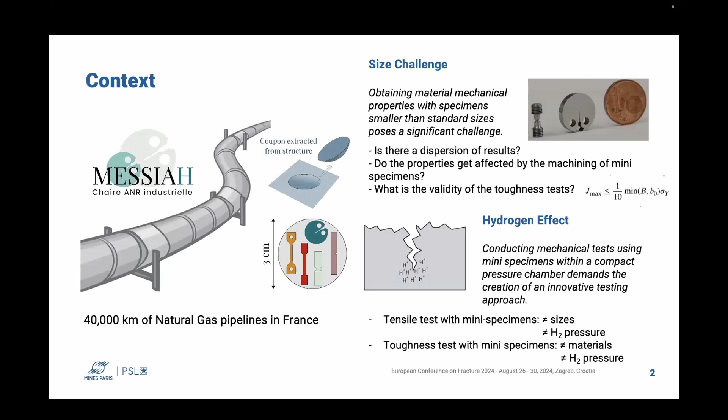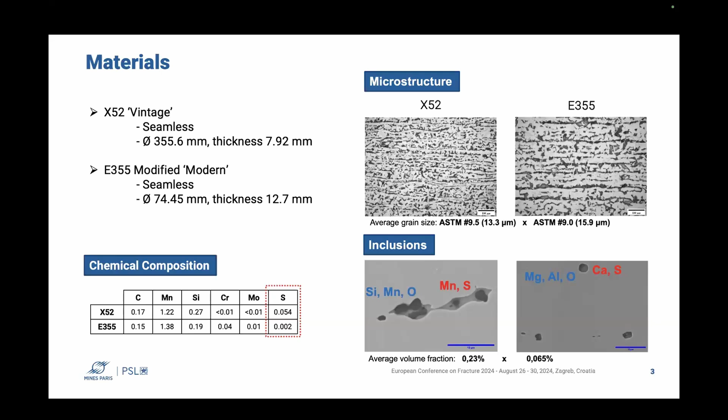Now for the geometries of the specimens. I will present results with a standard tensile specimen that has 4 millimeters diameter and 20 millimeters gauge length. Actually, I brought some specimens to show you.

There are 4 specimens here that are mini tensile specimens - you can pass them around. This is a standard toughness specimen, to compare with the mini toughness specimen. And here is the standard tensile specimen for comparison.

I present two geometries of mini tensile specimens, with 2.4 millimeters and 4 millimeters gauge length, and mini specimens with 1.2 millimeters diameter and 2 millimeters gauge length. Also the mini toughness specimens that have a width of 10 and thickness of 5 millimeters.

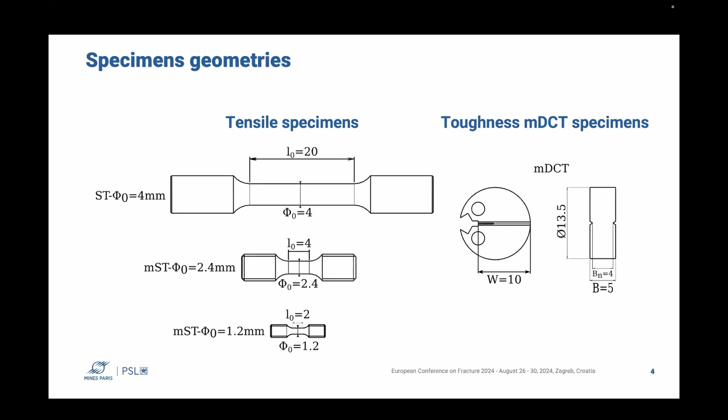First, to validate the mini size specimens, we performed tests in the MTS machine with an extensometer, controlling the environment in air condition. We followed the local strain, meaning the necking, with the edge tracing technique, where we put a camera and a light to follow the contour of the specimen, giving us information on the radial strain.

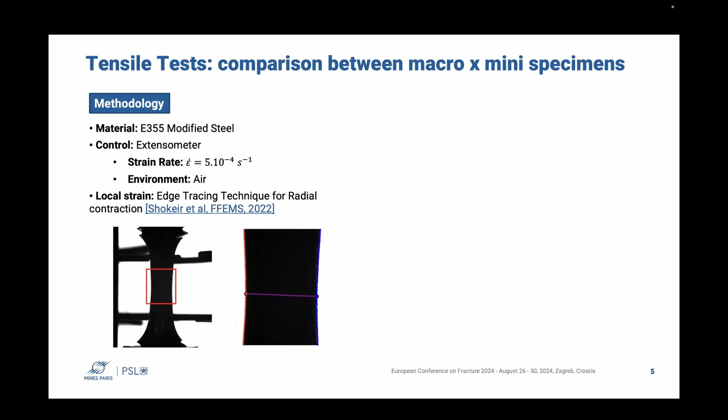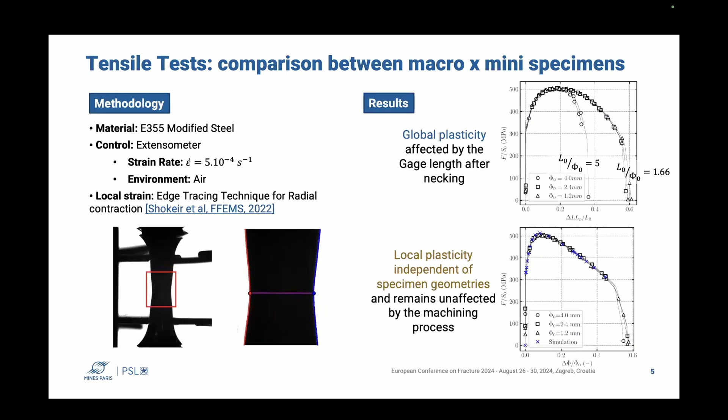Now let's talk about hydrogen embrittlement - I need to spend a little time here. This is our test setup for mini specimens in gaseous hydrogen. The heart of this setup is the pressure chamber, which has 4 sapphire windows, and we can use these windows to position cameras and lights to do the edge tracing technique during tests pressurized with hydrogen.

We can follow whatever we want. Here's an example with a mini toughness test where I can follow the load line opening displacement and also the angle displacement. This is associated with a controller, the Keyence controller.

This controller communicates with the MTS machine, so we can adjust the displacement rate of the MTS machine using information from the optical system. That is the innovation. Also, the MTS machine was designed for slow strain rate tests.

We can work with hydrogen, helium, and nitrogen up to 250 bar. We also have the capability to do gas analysis for oxygen and moisture, which we usually do before and after the test to control gas quality, since we know impurities in the gas can affect hydrogen embrittlement.

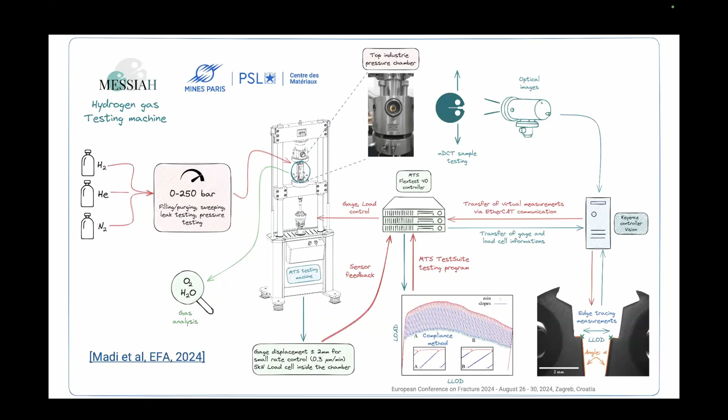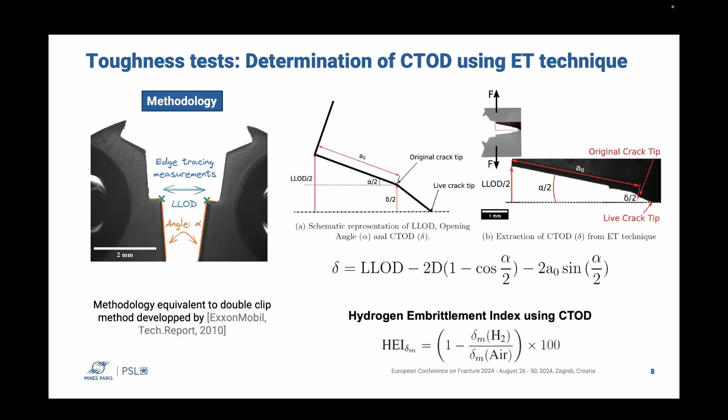And also, as we have the information of the LLOD and the opening angle, we can directly calculate the CTOD of the test using a methodology equivalent to the double clip by ExxonMobil. But instead of using 2 clip gauges, we can use the angle, and by geometrical construction we can achieve the CTOD.

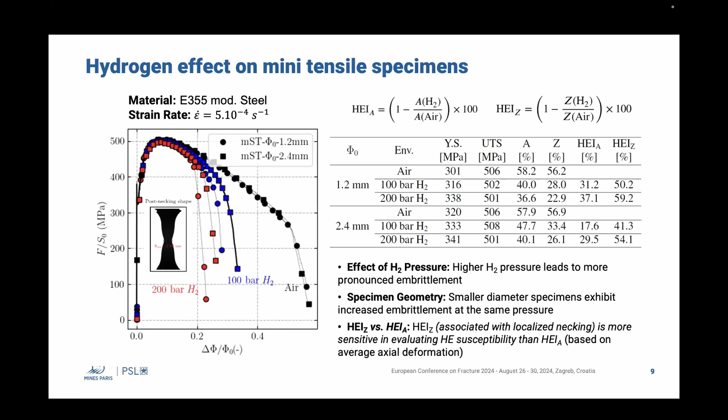And also we can see here, as we already told today, that the hydrogen embrittlement index calculated with the striction of the neck or reduction of area is more sensitive to hydrogen embrittlement.

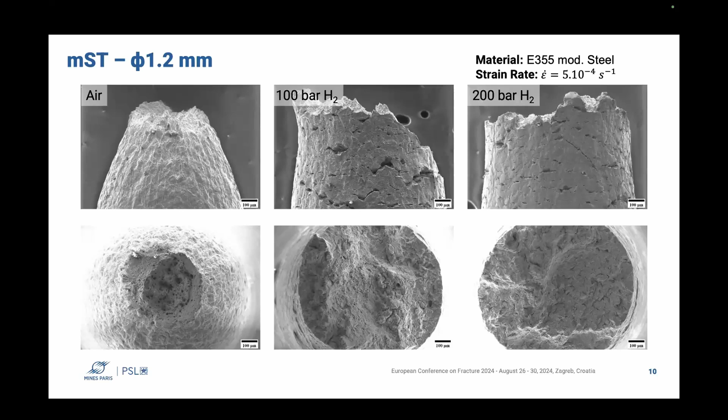So here I show the fracture surface. In there we have the typical ductile behavior we would expect. We can see extracts from 100 bar and 200 bar. For 100 bar, we can see the surface is 100% quasi cleavage, with a smooth transition toward the center where we can see the microvoid coalescence feature.

But those dimples we observe here are smaller than the dimples we observe in air condition. When we compare with 200 bar, we can see that we have quasi cleavage feature in almost all the fracture. But if we pay attention here, we can see very, very small dimples that are even smaller than the dimples with 100 bar.

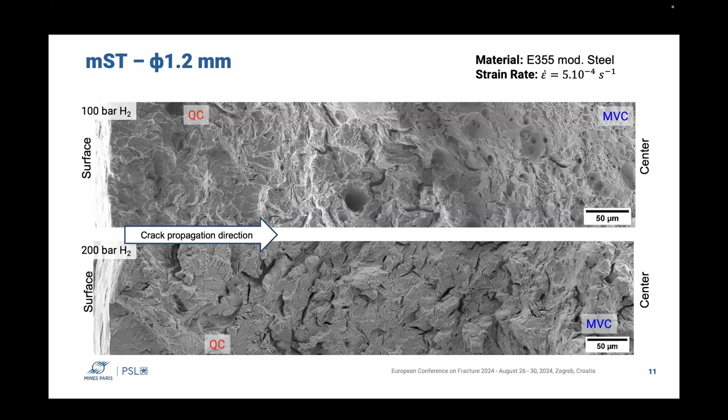Again, we see the fracture of these specimens. We can see the typical ductile behavior, and we can distinguish between the pre-crack, the blunting, and the propagation. At the beginning of propagation we have only microvoid coalescence. At 100 bar, we can still see the pre-crack, blunting, and propagation, but at the beginning of propagation we have a mixed aspect with coexistence of microvoid coalescence and quasi cleavage, which affects toughness.

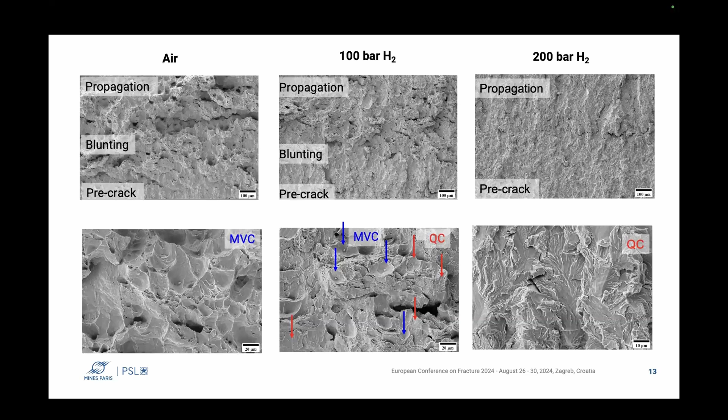At 200 bar, there is no blunting zone. We can see that the crack goes directly from the pre-crack to the propagation, and the beginning of propagation is 100% quasi cleavage. That is coherent with the pop-in we see in the plots.

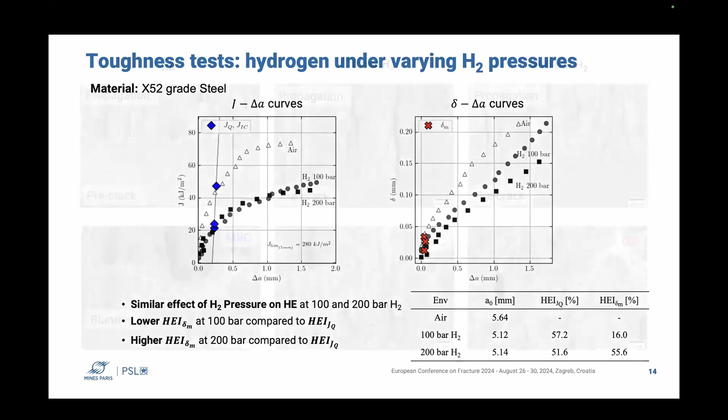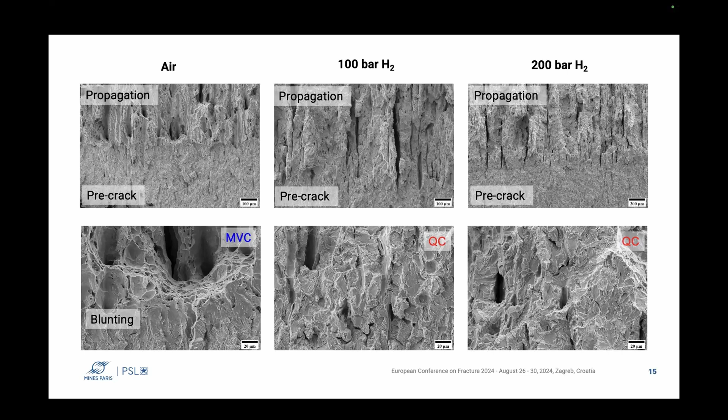So, to pass on, I presented here an innovative test setup to test mini specimens in a gaseous hydrogen environment. By performing the integration of optical extensometry with the test machine control, no significant size or machine effects were observed in the tensile tests.

We corroborate the work of our colleagues that the embrittlement index linked to the striction is more sensitive to hydrogen embrittlement. We can see also that the results with hydrogen for mini toughness specimens are already in the validity range. Careful interpretation of the results is crucial because it's a new methodology. Thank you very much.